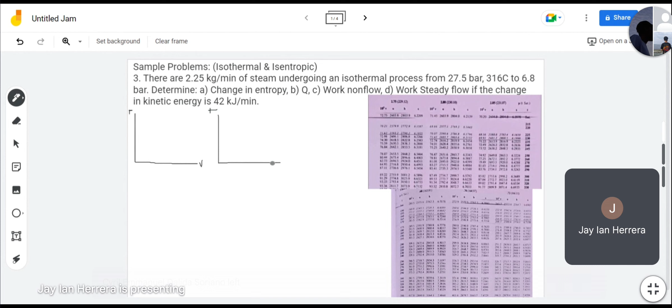From this problem, we can determine both properties of the steam. So first, we have steam undergoing a process at 27.5 bar and 316 Celsius.

So what pressure is 27.5 bar? Let's recall our pressure conversion: 1 atm is equivalent to 101.325 kPa, or 1.013 bar. We also have a generalized conversion factor: 1 bar is equivalent to 100 kPa.

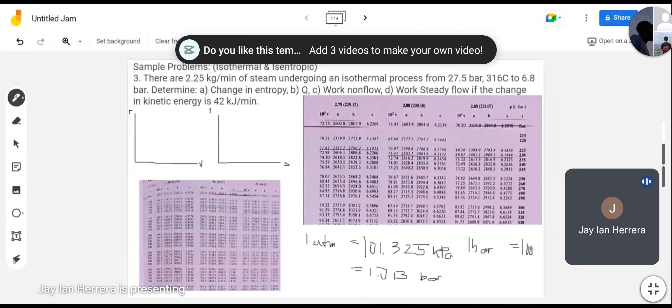So for this problem, the 27.5 bar becomes 2,750 kPa, or simply 2.75 MPa. At the same time, the 6.8 bar becomes 680 kPa, or simply 0.68 MPa.

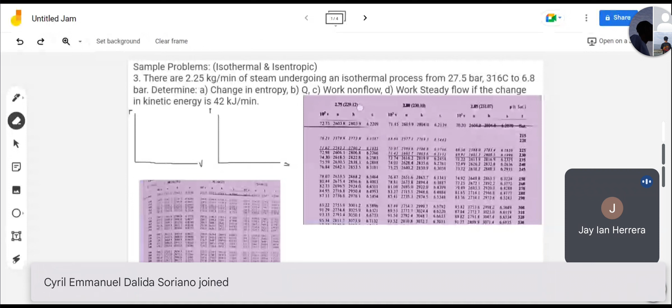So in this problem, we will determine whether our initial and final properties are superheated. From our initial property, we have 2.75 MPa as our initial pressure. If we go to the steam tables, even starting at the saturation pressures - this is the superheated part of the steam table, the pressures are listed, and next to it are the saturated temperatures.

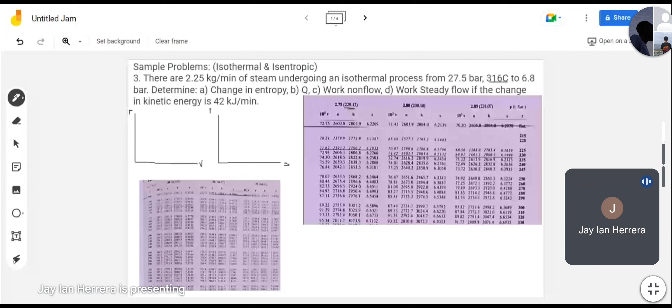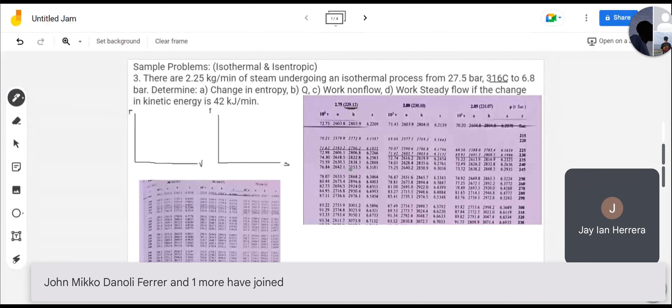Since the saturated temperature at 2.75 MPa is only 229.12, and in our initial properties our temperature is 316 degrees Celsius, it exceeds the saturated temperature for that pressure by a lot. So this is obviously superheated vapor or superheated steam.

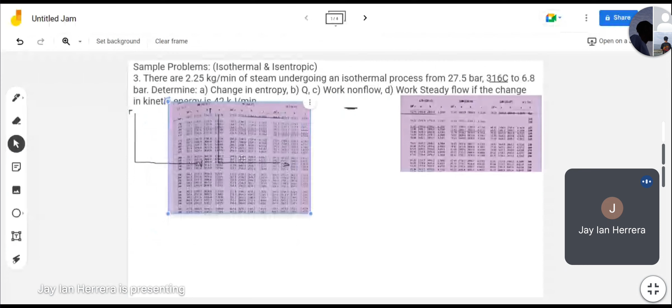Similarly for our final properties: at point 0.68 MPa, the saturated temperature is only 163.81 degrees Celsius. So that's where it starts to expand as steam.

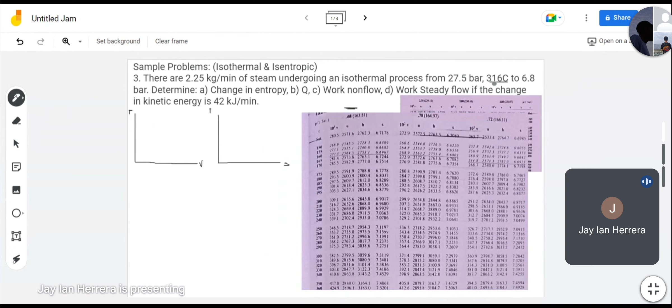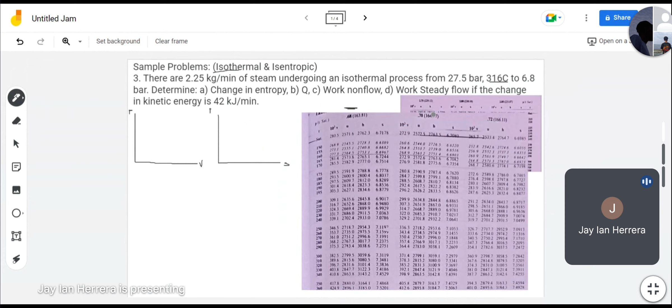Since 316 is our given temperature, and take note this is isothermal so temperature 1 is equivalent to temperature 2, there's also a big difference between the saturated temperature and our given temperature. So we will treat this also as superheated steam.

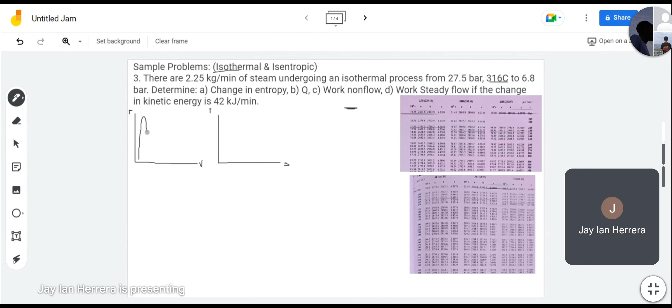Okay, so going back, let me crop this steam properties or steam table. So for our PV diagram, let's draw first our PV before determining our properties per point.

So they are both superheated. Technically, this is our initial point for our PV, and then it just superheats, so it won't cross or intersect the saturated vapor line. Take note, that line is the saturated vapor line. So it just goes like this, a curved line. This is our point 1.

And then it expands under isothermal conditions to point 2. So the pressure goes down. This is pressure 1 as 2.75 MPa, and this is pressure 2. Our pressure goes down to 0.68 MPa.

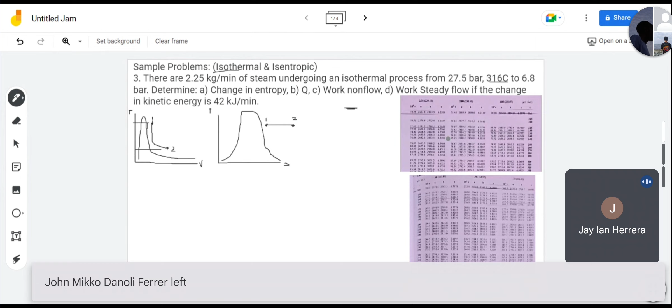So for our PS diagram, simply this is point 1 and point 2, like that. Why? Because both points are superheated steam, so they're on the right side of our saturated vapor line.

Okay, so at point 1, let's get its properties. What are we looking for? Change in entropy, heat, work non-flow, and work steady flow.

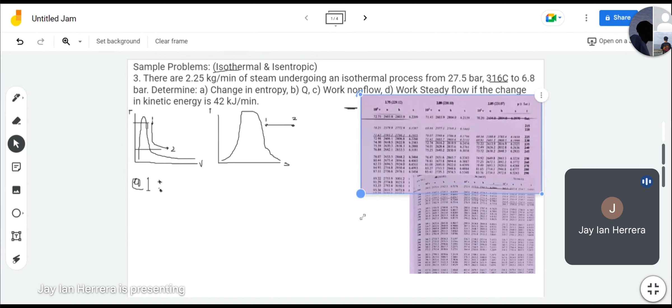So our initial properties, point 1. First, entropy, since we're looking for entropy. At 2.75 MPa and 316 degrees Celsius, this is our temperature column or row.

We'll go to the middle of 310 and 320 degrees Celsius. Let's trace it to the left, to align with the 2.75 superheated properties, and then move 310 and 320 to the other side so it's easier to read. So here is 310 and this is 320.

So it's just interpolation. I taught you interpolation last time. So getting the entropy, obviously our properties are in the middle, between 310 and 320 degrees Celsius.

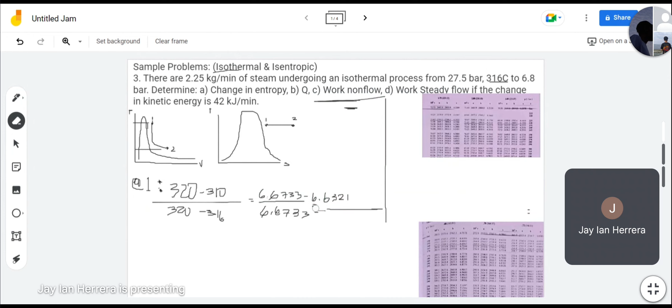I think this is the other interpolation method, like the one I taught last meeting. And then this is minus our entropy - that's correct - minus our entropy 1 or S1. That's our entropy 1. Please solve it, get your calculators and try to solve.

Anybody who got the answer already for our S1?

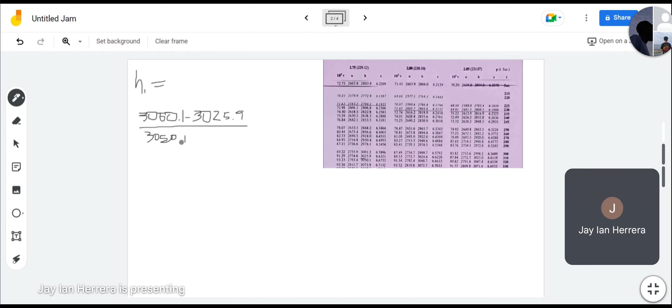Let's interpolate this. I'll just copy it. So here, between 310 and 320, that's our range. So let's interpolate. Our higher limit is 3060.1 minus 3025.9, all over the higher limit, that is 3050.1 minus x, or our enthalpy 1, correct, equivalent to 320 minus 310.

Or simply, this is the numerator on the other side, all over 320 minus 316. Why 316? Because that's our temperature, the temperature given in our initial property. So, 316. Just interpolate, you can shift solve that, or plug it directly in the calculator. Shift solve, or you can also do it manually with algebra. The positions are interchangeable, it can be on the left hand side or the right hand side, the resulting enthalpy will be the same.

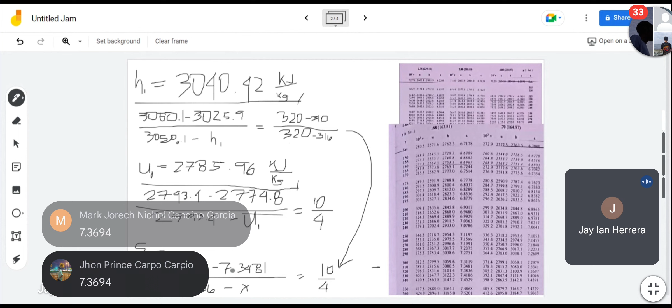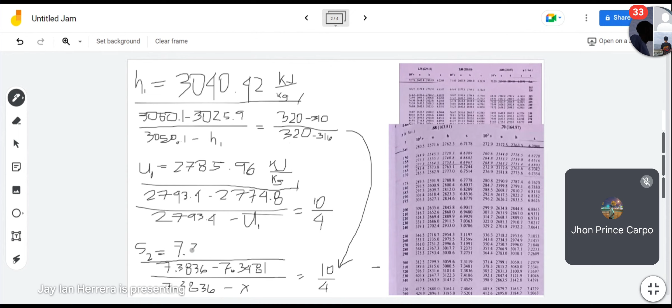So, what's our S2? 7.3694. Okay, kilojoule per kilogram Kelvin.

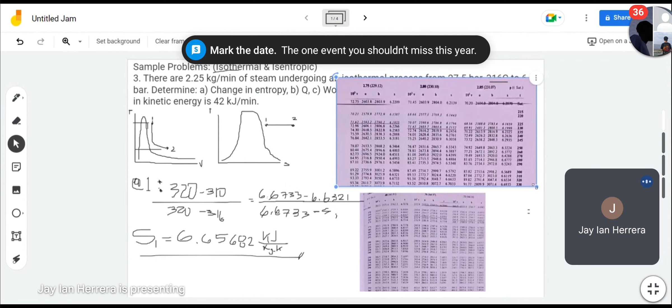Sige, so sobra na natin yung kailangan natin. For letter A, that is change in entropy yata. Change in entropy, heat, work non-flow, and work steady flow. Okay.

Change in entropy, that is simply S2 minus S1. Since nasolve na natin, nakuha na natin yung S1 and S2. S2 over S, mas malaki si S2, S2 minus S1. Sir, pag mas malaki yung S2, pwedeng magbaliktaran. Kamali lang ako, so that is still S2 minus S1, H2 minus H1 and so on.

Right, okay, S2 natin, so we have 7.3694 minus our S1, it is 6.6568. So both are in kilojoule per kilogram Kelvin.

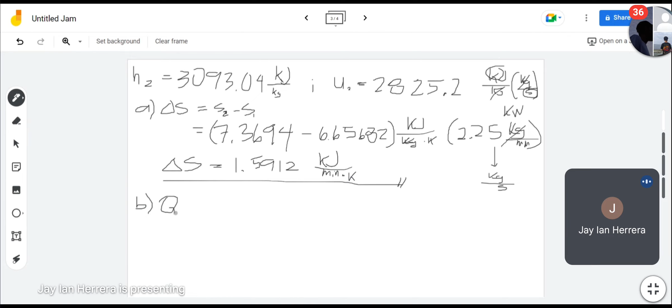And then letter B, yung ating heat transfer. So if ma-recall nyo yung formulas na binigay ko, last year pa yun, o yung ating, before tayo maging formulas for process, we have heat transferred for isothermal as T delta S.

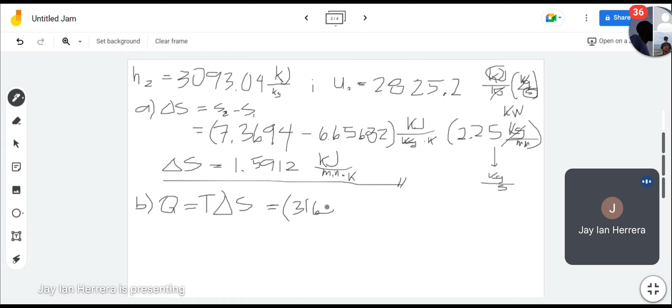Meron na tayong delta S dyan. So, i-convert na lang natin yung T natin. Given natin T, our temperature is 316. So, kailangan natin gawing Kelvin by just simply adding 273. So this is Kelvin multiplied by our delta S na 1.5912 kilojoule per minute Kelvin.

Sir, excuse me po, wait lang po. Okay, sir, diba ano po? Doon po ba sa delta S na 1.5912, na-multiply na po ba doon yung 2.25 o hindi pa? I don't know, sige. Kasi po, kilogram per second po yung sinasabi nyo kanina, diba? Kahit minute lang, okay na yung minute lang. Ay, sige po. Pero ano bang ano ba itong answer na to, naka-second? Paki-confirm na lang natin, delta S natin.

Mukhang tama naman. I-minute pa rin natin. Okay, so tuloy lang natin. Sa Q natin, makakasa lang yung Kelvin natin. So 589 multiplied by 1.5912 lang. So that is 937.2168 kilojoule per minute. Okay.

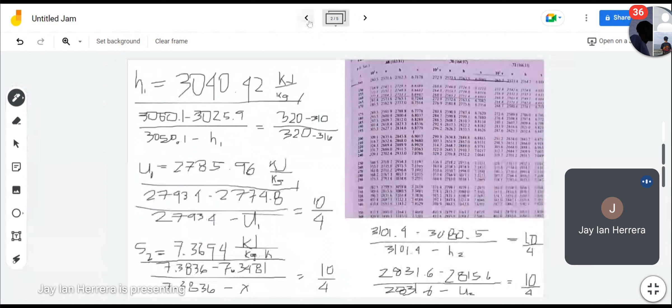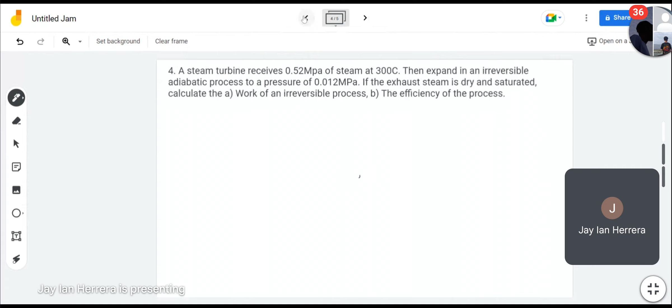Okay, so nasolve natin yung heat natin, that is 937.2168. So, delta yun na lang kulang natin. Hindi naman mahirap yan since nasolve na natin or nahanap na natin yung properties natin for U1 and U2. Ito natin. Okay, for delta U, U2 minus U1.

2825, minus 2785.96.

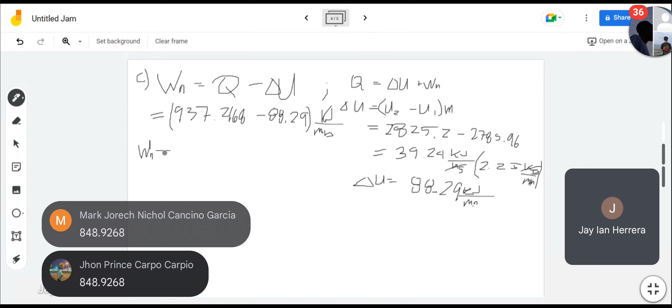So therefore, our work non-flow for this problem is 848.9268, this is kilojoule per minute.

And then lastly, for our work steady flow. Given our formula for work steady flow, that is heat minus the change in potential energy minus the change in kinetic energy minus the change in enthalpy. So we're given KE from our problem, and then there is no PE. So that becomes zero. There is no given height or elevation, and no given PE itself.

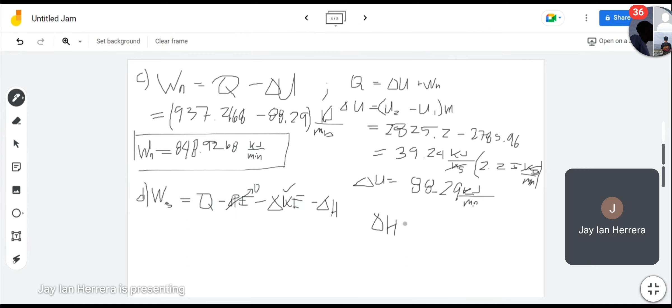So it is safe to assume that potential energy is zero. So let's solve the change in enthalpy. This is simply H2 minus H1, multiplied by the mass. We have our H2 as 3093.04, and our initial enthalpy as 3040.42, multiplied by 2.25.

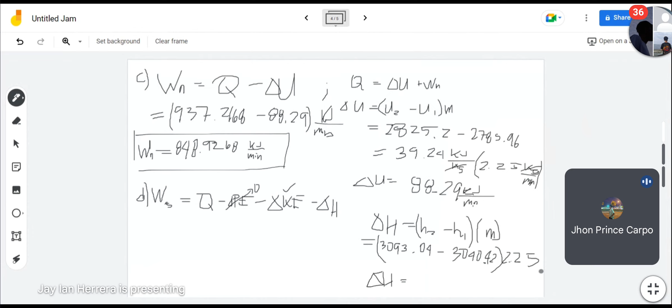The unit analysis is the same. Therefore, our delta H is negative 3747... negative, yes sir, let's redo it. So that is 3093.04, 118.395. Yes sir, this is kilojoule per minute.

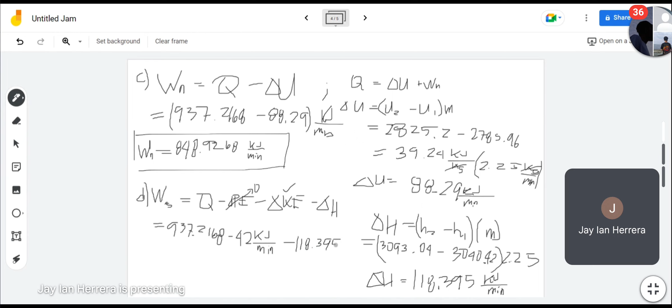Okay, so we can now solve our work steady flow. Previously we solved our heat, so that's 937.2168. Also, our change in kinetic energy given in the problem, that is 42 kilojoule per minute. Minus our change in enthalpy, which is 118.395, kilojoule per minute.

So what is our final answer? 776.8218.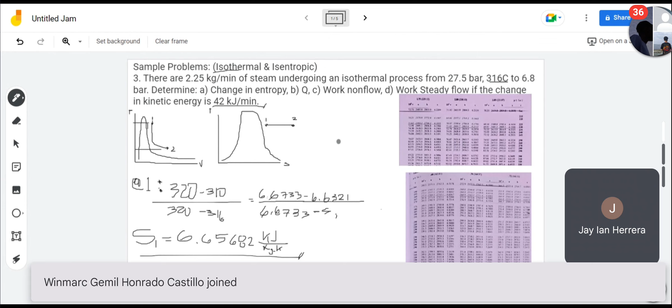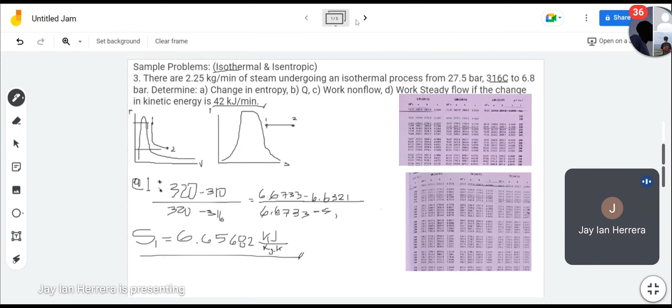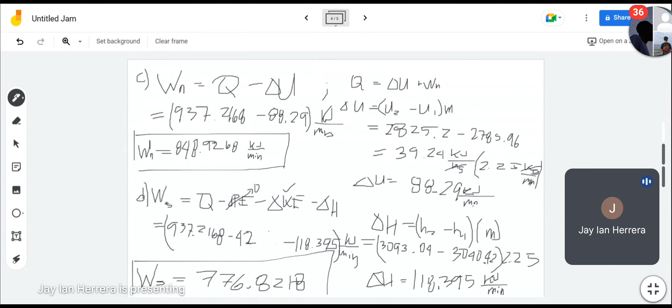So that's how it is for our isothermal process. Technically the same temperature around points 1 and 2. That's also why our TS diagram is a straight line, since the temperature did not change from 1 to 2. So any questions on how we got our delta S, the heat transferred, work nonflow, and work steady flow? Or if you're confused about the interpolation and the table, we can repeat it. Any questions so far, class?

If there are none, let's proceed to our example for the isentropic process. So a steam turbine receives 0.52 MPa of steam at 300 degrees Celsius. So our point 1 is already superheated since it's at 300 degrees Celsius. Then it expands in an irreversible adiabatic process to a pressure of 0.012 MPa. If the exhaust steam is dry and saturated, calculate the work of the irreversible process and the efficiency of the process.

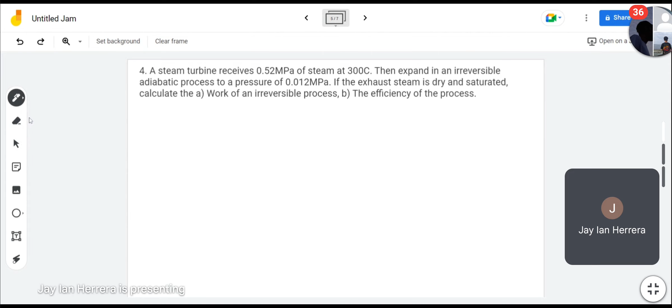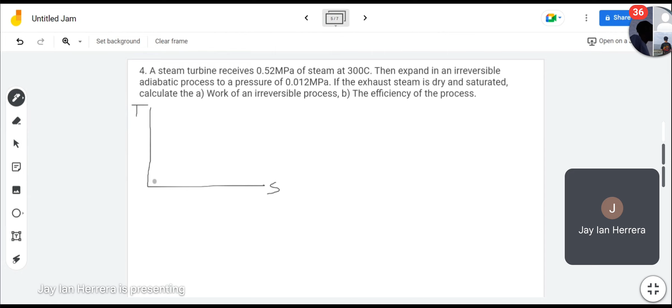So for this, let's redraw the PV and TS diagrams. This is an adiabatic or isentropic process, so entropy is constant. For this example, only the TS diagram will affect us here since this is our point 1, which is our pressure 1. And it expands, which is supposed to be adiabatic. So technically it should fall here, since we're talking about isentropic. So it should just be a straight line, right, for S.

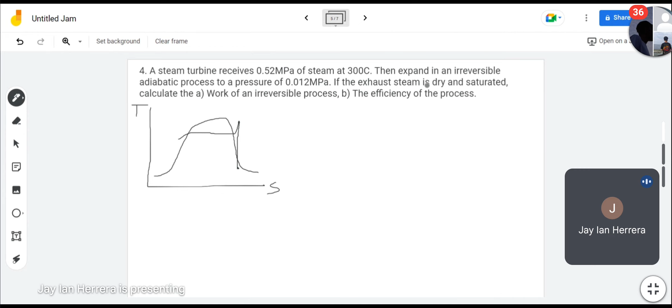Since our S is the x-axis and we're dealing with isentropic, theoretically it should just be a straight line. But the problem says if the exhaust steam is dry and saturated, it seems to curve, either stopping here or at this point, since we're also given our pressure of 0.012 MPa. So if the exhaust steam is dry saturated, it curves like this, bending here to become saturated, to hit our saturation line. So that's where we'll get the efficiency of the process.

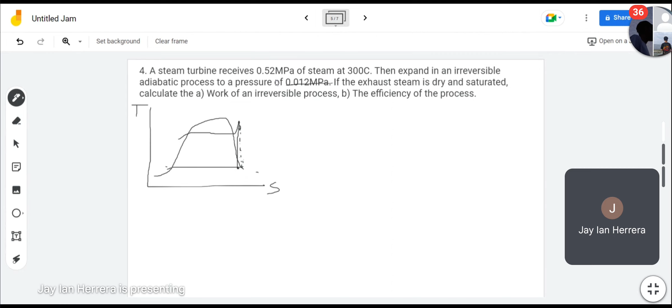Anyway, let's solve and determine the properties first. For the initial properties, wait, it's loading. This is at point 1, and given temperature of 300. Let me repeat: at 0.52 MPa, the saturated temperature is 153.34. And since our given property says our steam is 300 degrees Celsius, it exceeds our saturated temperature, therefore this is superheated.

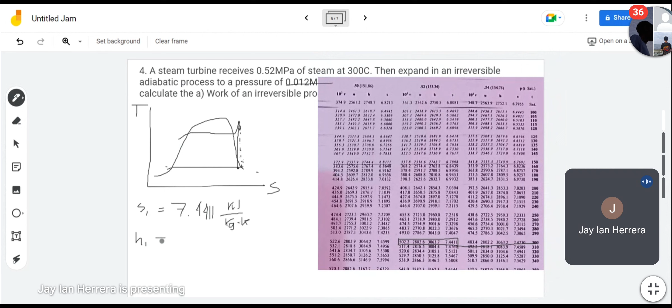So for superheated, we don't need to interpolate since it's given, exactly at 300 degrees Celsius. So under 300, this is it, we just trace it along the row of our 0.52 MPa. So these are all our properties, let me list them down. So for our S1, which is technically also our S2, this is 7.4411 kilojoule per kilogram Kelvin. For our H1, we have 3063.7. And for our internal energy, we have 2802.6.

Okay, yan lang. Ano tayo dyan?

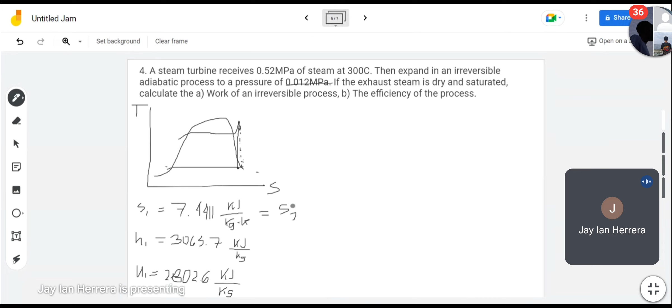Okay, so theoretically, dapat, if ideal, isentropic tayo, this should be equivalent to our S2. But since sabi dito sa problem natin, if the exhaust steam is saturated, meron tayong ginawang method o process para maging saturated yan. But if hindi given as saturated, S2 lang din natin yan. Since isentropic tayo, straight line lang yan.

So to clarify, under steam, for superheated vapor, nakalagay na rin dyan yung saturated vapor properties natin. Under sat, temperature is saturated. So itong properties na ito, saturated vapor properties na rin yan under 153.34 degrees Celsius. Okay, ito na yung properties niyan.

So sabi dito, if it is saturated vapor, nung nag-exit siya o final process niya, meron tayong entropy niyan as 6.8081 kilojoule per kilogram Kelvin. And our enthalpy is 2750.5.

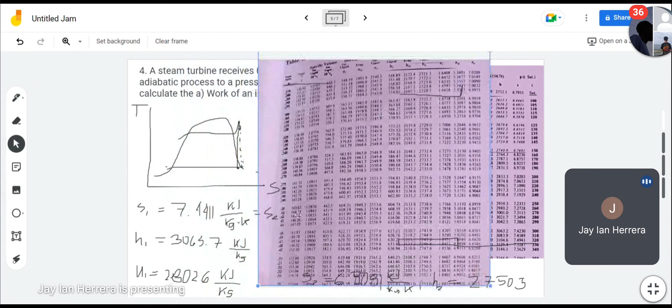So this is in saturation pressure properties. So under 0.52, ito yan. Okay, so our Hg natin is 2750.5, ayan same yan. Then our SG, ito yung SG natin, under 0.52 is 6.8081. Same lang din sa S2 o SG na nakalagay dito.

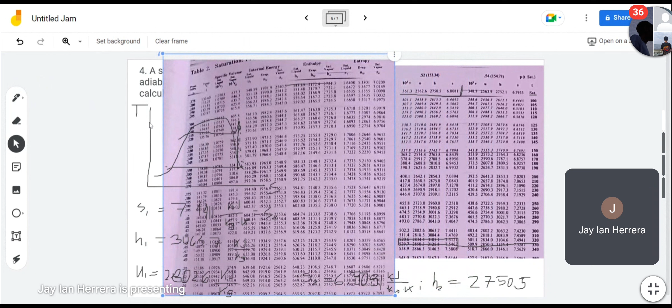Properties na ito. Ayan, what else? Hindi natin kailangan kahit yung U o internal energy. Okay, so mabilis na ito.

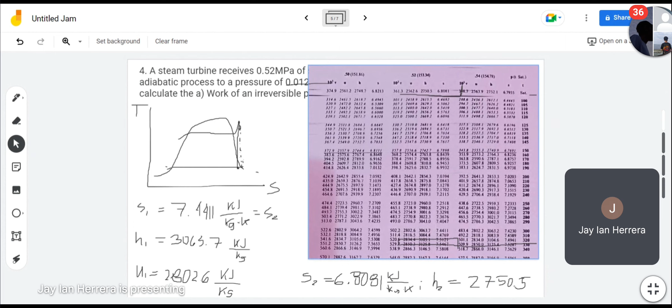Okay, so hanapin lang natin, hindi ko na-picturean yung properties at point. Ito, 0.012 MPa, so dito yan.

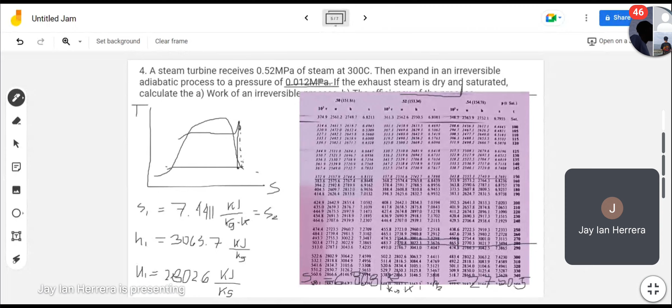Wait nyo, for our final properties, so labo. So this is saturation pressure, this is not superheated. Ano tayo dun sa ito, 0.012 MPa, so andito yan.

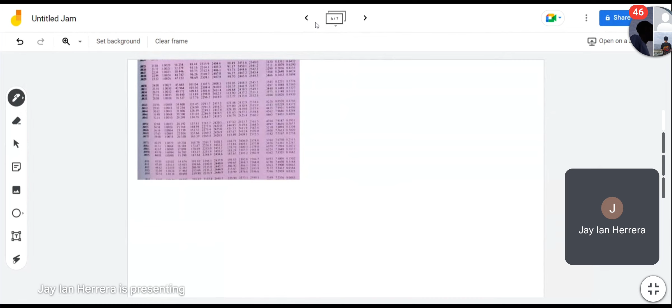Medyo malabo nga lang, so kukunin natin yung properties niyan. So we have Hg at this point, o H2 natin, equivalent to Hg at the pressure 2, o 0.012 MPa. So our Hg is 2591.1 kilojoule per kilogram. Also we must get our entropy at this point, so that is 6.0563.

Di ba, this is wrong pala yung ating kinuha dito, pero magagamit pa rin naman natin yun, so that is S2 natin. Is it? Ito yun, no? 6 point... or 8 pala, 8.0863.

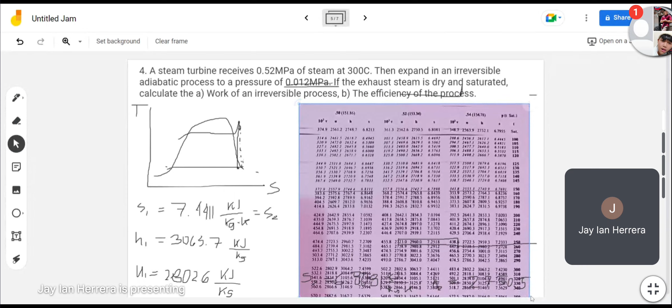Okay, so for letter A, ang hinahanap lang naman dyan is simply work of an irreversible process. Balik ko lang to.

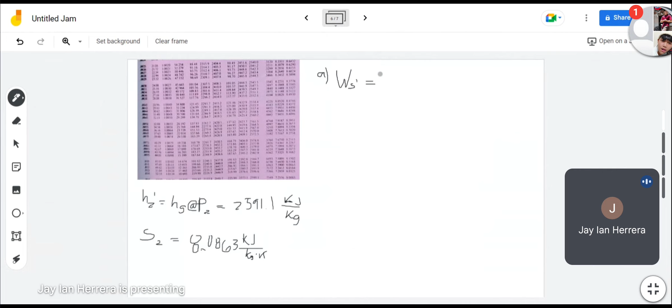So that is just simply, technically this is H2 prime, since original H2 natin kasi, or this is point 1, so this is point 2. Ideally, this is point 2, yung point dito, nung naging saturated yan, that is parang 2 prime, point 2 prime. So for letter A, ang work steady flow natin, o the work of an irreversible process, is simply our H1 minus our H2 prime, o yung saturated na at 0.1 or 0.012 MPa.

So for letter A, it's simply 3063.7 minus our H2 prime, that is 2591.1, both are in kilojoule per kilogram. Walang binigay na mass flow rate o mass, kaya hindi natin kailangan i-cancel yung kilogram o i-multiply into a mass. So work steady flow o work irreversible process natin is 472.6 kilojoule per kilogram.

Okay, so for letter B, kinukuha kasi dyan is efficiency of the process. So since this is process lang, hindi pa tayo cycles, ang tinutukoy dyan is yung efficiency o E, sige N na lang. That is work steady flow prime all over work steady. Yan, so technically ito na yung numerator natin.

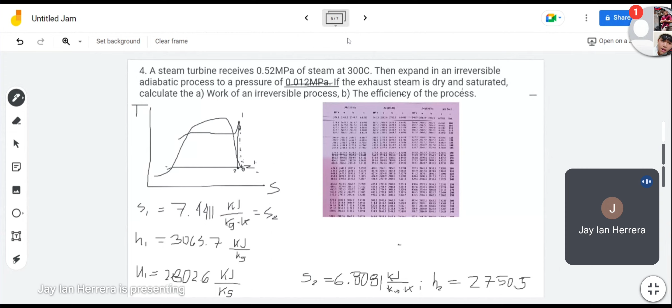Pero for the denominator, yung work steady na hindi prime, i-solve muna natin since wala nang time, solve muna natin yung mix wet mixture natin o mix vapor natin dito, yung wet mixture vapor natin dito at point 2 when this is isentropic. Kung na-solve na natin yung H2 natin na wet mixture, ayan, we will solve for our work of an adiabatic reversible process na S lang o isentropic. And then kung na-solve na natin yung work steady flow only na hindi prime, divide lang natin siya sa steady flow.

Okay, so I will send na lang the screenshot if matagal namin sa block 1 yung dito sa part na to, so same example lang din naman ibibigay ko sa kanila. Pero for letter A, this is the final answer. And then I will send na lang a screenshot of the letter B if matagal namin sa amin.